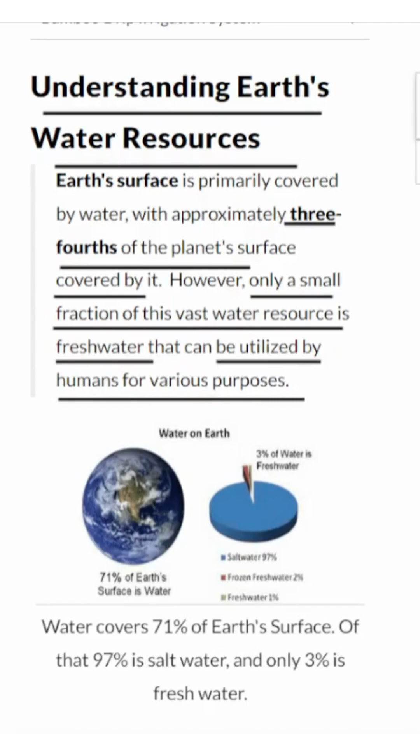The kind of water we can use for various purposes like drinking, farming, and more. So where does this fresh water come from? Well, the main sources of fresh water are surface runoff and groundwater, and these are both vital parts of something called the Earth's hydrological cycle.

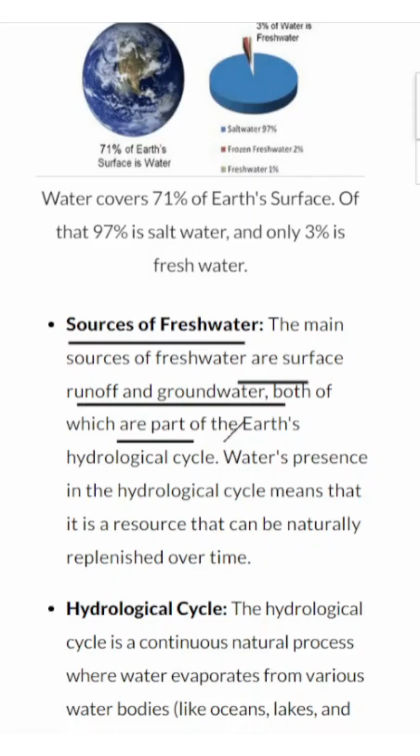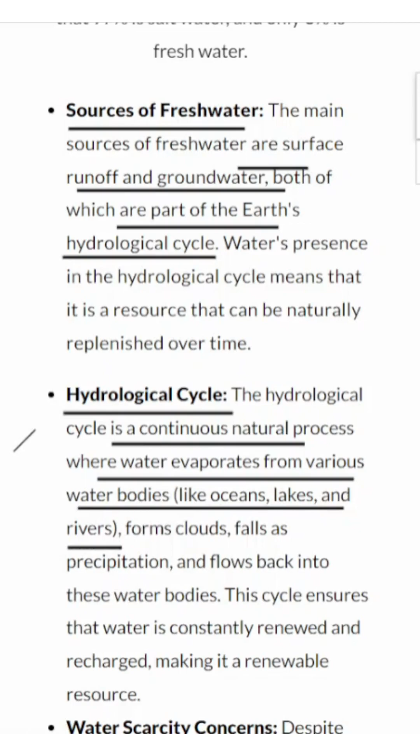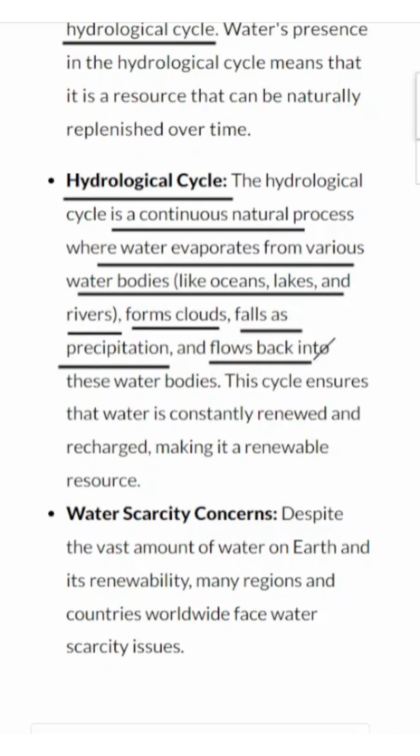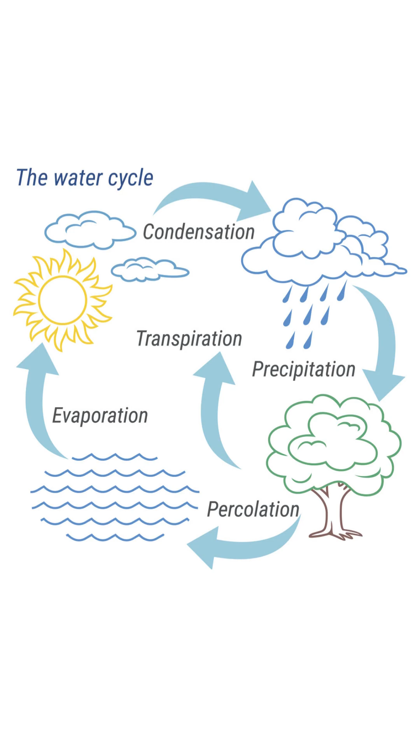The hydrological cycle is like a never-ending dance of water. It all starts when water evaporates from various water bodies, such as the oceans, lakes, and rivers. This vapor forms clouds, and then, like magic, it falls back to the Earth's surface as precipitation. After that, it flows back into those same water bodies where it started. Imagine it like a giant water recycling system. This cycle ensures that water is constantly renewed and recharged, making it a renewable resource. It's like nature's way of ensuring that we have a fresh supply of water.

Now, despite this fantastic cycle and the abundance of water on Earth, there's a bit of a problem. Many regions and countries around the world face water scarcity. So even though Earth has lots of water, not all of it is easy for us to use.

Let's quickly solve a question to revise what we have learned. How much of Earth's surface is covered with water?

The correct answer is option C, 3/4. About 3/4 of the Earth's surface is covered with water. That is, about 71% of the Earth's surface has water in it.

Now that we've explored Earth's water resources, let's turn our attention to a critical issue: water scarcity and the need for water conservation and management. Why is it so important? Well, let's dive right in and find out.

Despite the apparent abundance of water on Earth, the looming threat of water scarcity persists. Water shortages aren't limited to regions with low rainfall or prone to drought, such as the arid deserts of Rajasthan. Often, water scarcity arises from overexploitation, excessive use, and unequal access among different societal groups.

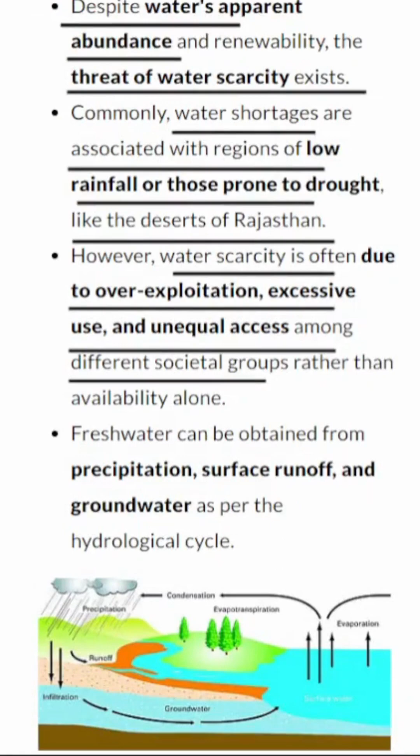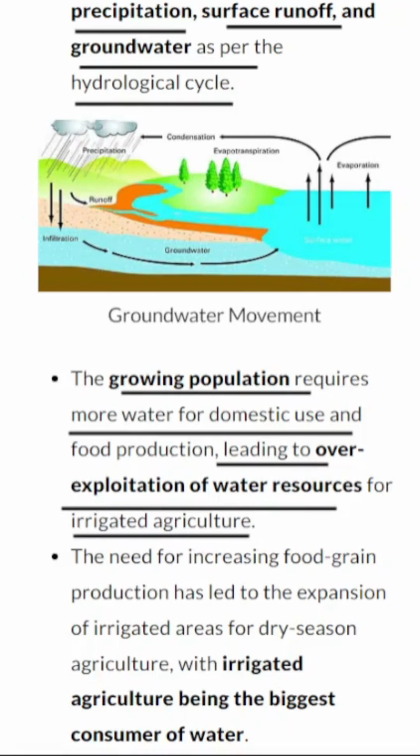Freshwater, essential for survival, is sourced from precipitation, surface runoff, and groundwater through the hydrological cycle. The growing global population demands more water for domestic use and food production, leading to the overexploitation of water resources, especially for irrigated agriculture.

Irrigated agriculture, which significantly contributes to food grain production, happens to be the largest consumer of water. To address this issue, there's a pressing need to revolutionize agriculture by developing drought-resistant crops and promoting dry farming techniques. These steps are crucial in mitigating water scarcity, ensuring food security, and preserving freshwater resources.

Furthermore, post-independence India has witnessed substantial industrialization and urbanization, offering abundant opportunities for growth. However, the rapid growth of industries places immense pressure on existing freshwater resources, as industries are heavy consumers of water and power.

Let's solve another question to test our understanding. Which sector is the biggest consumer of water?

The correct answer is option C. Irrigated agriculture is the biggest consumer of water. This is because water is essential for crop growth, especially in areas where rainfall is not sufficient or reliable.

Hydroelectric power plays a pivotal role in India's energy landscape, contributing to approximately 22% of the total electricity produced. This renewable energy source harnesses the power of flowing water to generate electricity, making it an environmentally friendly choice.

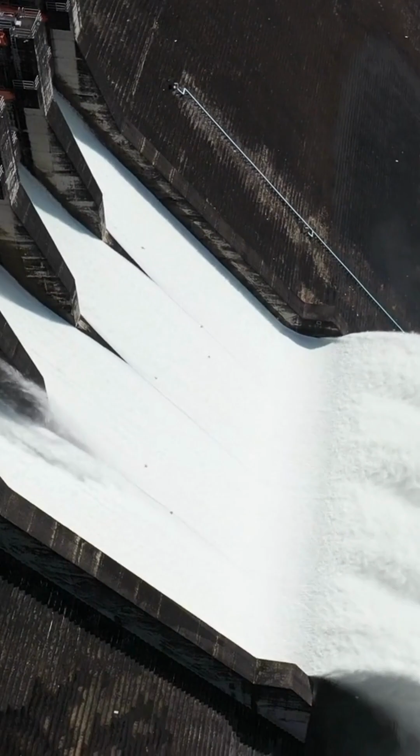However, the increasing growth of urban centers with dense populations has raised the demand for both water and energy, further compounding the challenge. While the quantitative aspect of water scarcity is a pressing concern, there are situations where water is available

in sufficient quantities, but its quality is compromised due to pollution. Pollution sources range from domestic and industrial waste to chemicals, pesticides, and fertilizers. Ensuring access to clean and safe water is critical for the health and well-being of communities.

Recognizing the importance of improving people's quality of life, especially in rural areas, the Indian government has launched initiatives like the Jal Jeevan Mission. This mission is dedicated to providing every rural household with a regular supply of potable piped water, addressing both the availability and quality of water.

Let us now delve into the concepts of multipurpose river projects and integrated water resources management, which are essential pillars for ensuring the efficient and equitable use of our water resources in an ever-evolving world.

Dams are more than just structures for irrigation. They serve a multitude of purposes, including electricity generation, water supply for domestic and industrial uses, flood control, recreation, inland navigation, and fish breeding. These projects are now referred to as multipurpose projects, where the various uses of impounded water are integrated.

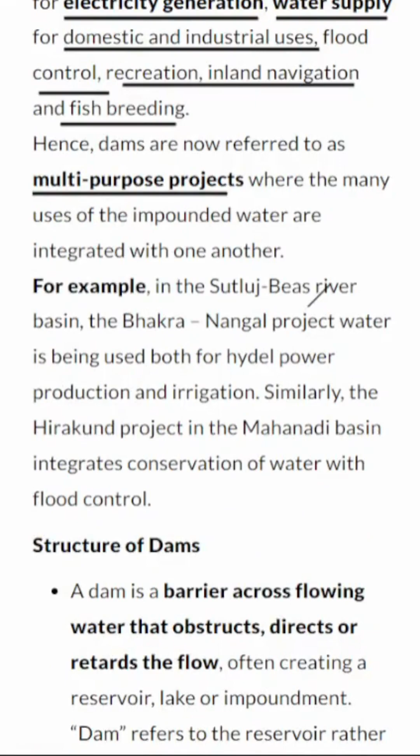For instance, the Bhakra Nangal project in the Sutluj-Beas River Basin efficiently combines hydel power production and irrigation. Similarly, the Hirakud project in the Mahanadi Basin integrated water conservation with flood control.

Structure of dams. Dams are engineering marvels designed to obstruct, direct, or retard the flow of flowing water, often creating reservoirs or impoundments.

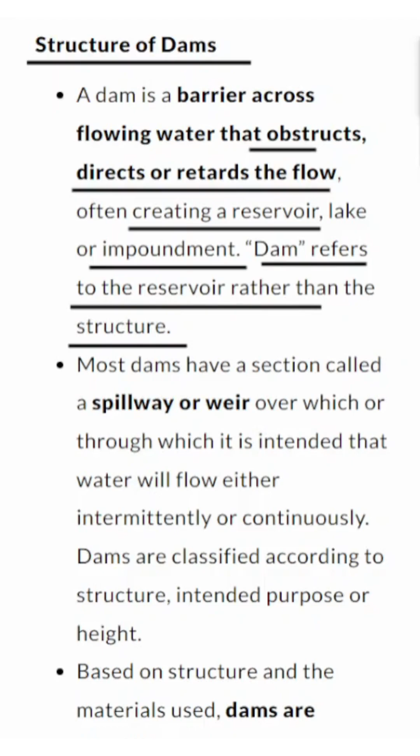It's important to note that the term dam refers to the reservoir formed rather than just the structure itself. Dams come in various types based on structure and materials, including timber dams, embankment dams, and masonry dams. They can also be classified by height, such as low dams, medium-height dams, and high dams.

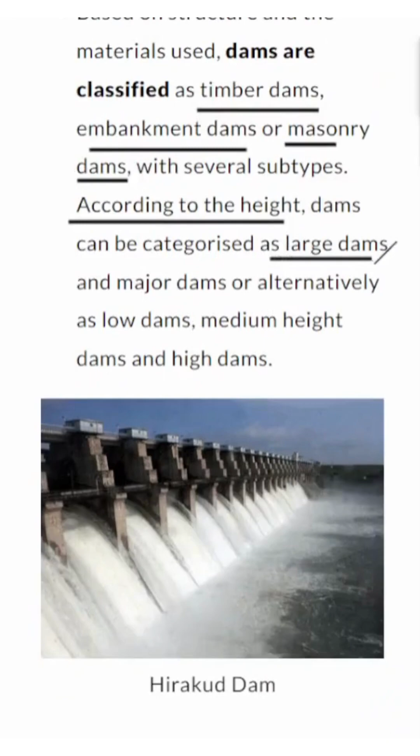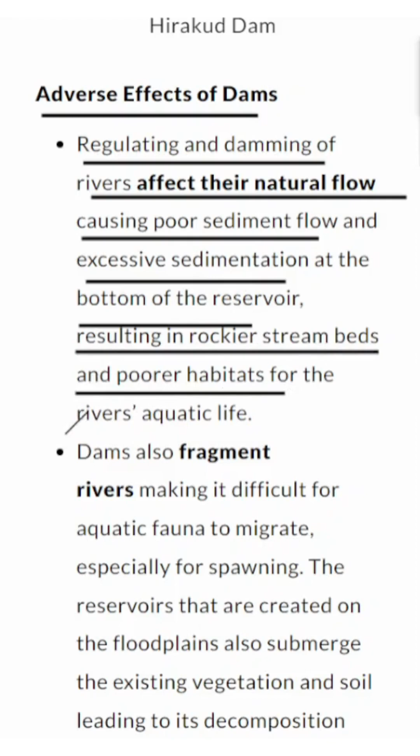Adverse effects of dams. While dams offer numerous benefits, they also have adverse environmental impacts. Regulating and damming rivers can disrupt their natural flow, leading to poor sediment flow and excessive sedimentation at the reservoir's bottom. This can result in rockier stream beds and less hospitable habitats for aquatic life. Dams can also fragment rivers, making it challenging for aquatic fauna to migrate, particularly for spawning. Additionally, the creation of reservoirs on floodplains can submerge existing vegetation and soil, causing decomposition over time.

Change in cropping pattern. Irrigation has been a game-changer in the agricultural landscape, leading to shifts in cropping patterns. Farmers have transitioned to cultivating water-intensive and commercial crops, which, while boosting agricultural output, carry significant ecological consequences. One such consequence is the salinization of soil, where the soil becomes excessively salty due to continuous irrigation.

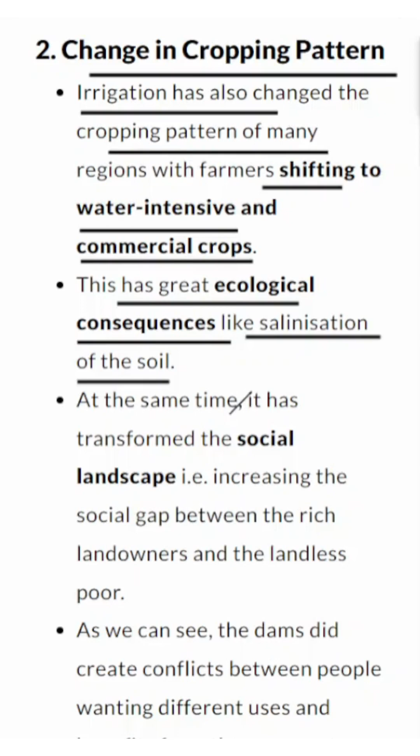This transformation in cropping patterns has also shaped the social fabric of farming communities. It has widened the social gap, creating disparities between wealthy landowners and landless individuals who rely on farming. Furthermore, the allocation of water resources for different purposes has often sparked conflicts among stakeholders with varying interests.

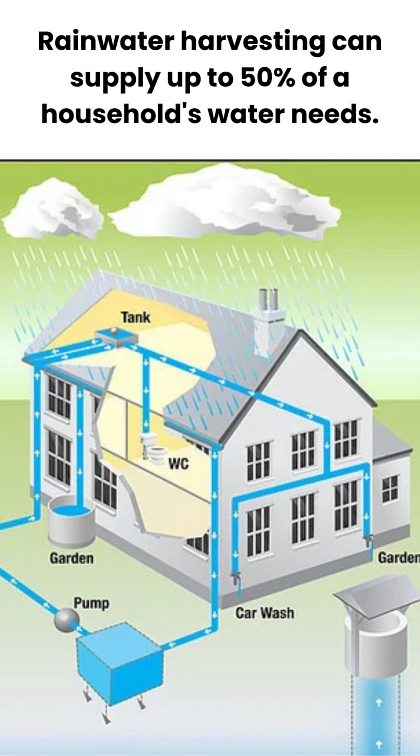Students, did you know? In some parts of the world, rainwater harvesting can provide up to 50% of a household's water needs, reducing the dependence on traditional water sources and promoting sustainability. Let us now explore the techniques, benefits, and role of rainwater harvesting in shaping a more sustainable future.

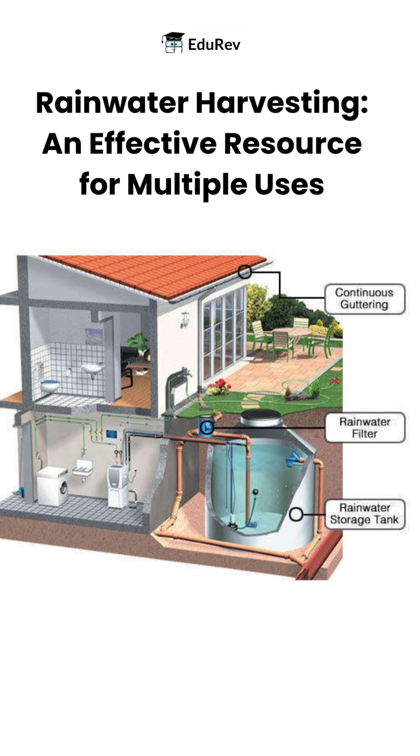Collecting and managing rainwater from rooftops is an effective way to harness a valuable natural resource for various purposes, such as irrigation, household use, or groundwater recharge. In this system, the process begins with the collection of rainwater using a PVC pipe. The collected rainwater is filtered using sand and bricks to remove impurities. Filtered water is stored in a sump for immediate use. Excess water goes to a well for storage and groundwater recharge. Water can be later extracted from the well for various purposes like irrigation or household use, ensuring sustainability.

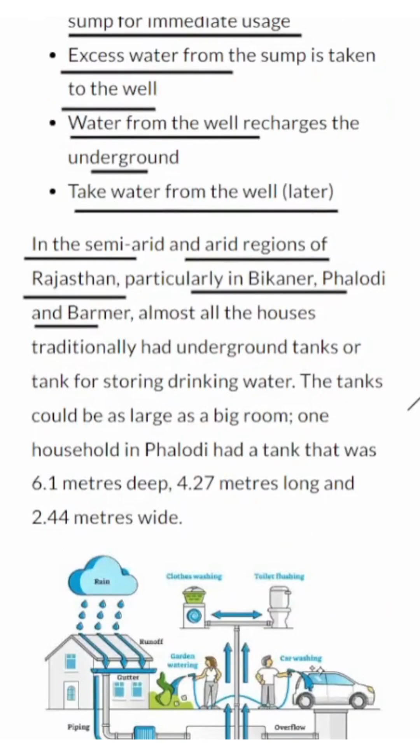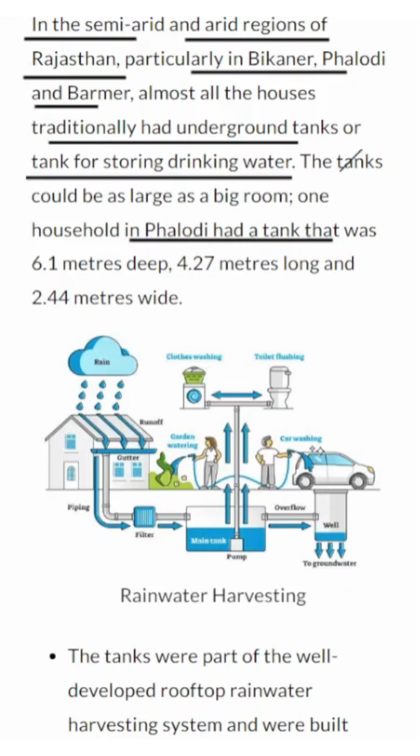In regions characterized by semi-arid and arid climates, like Rajasthan's Bikaner, Phalodi, and Barmer, traditional rainwater harvesting practices have been a lifeline. Houses in these areas traditionally featured underground tanks or tankas for storing rainwater. These tanks could be quite substantial, some even as large as a room. Rooftop rainwater was efficiently channeled into these underground tankas via pipes connected to the sloping house roofs.

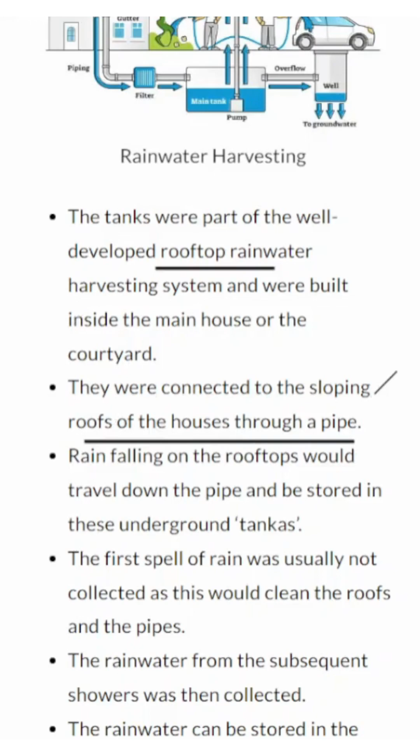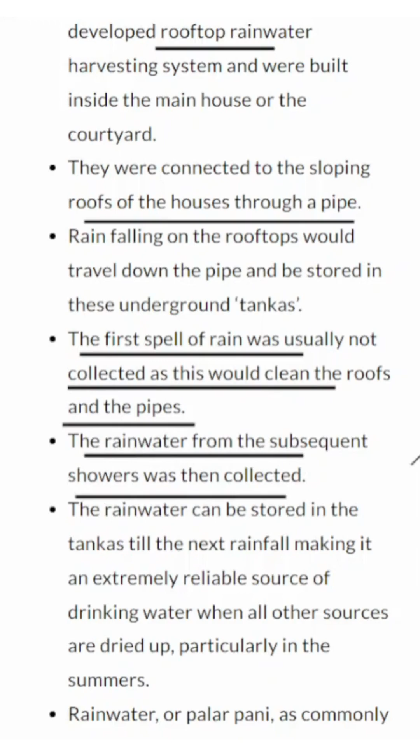Interestingly, the initial rain spell was typically skipped, as it served to clean the roofs and pipes. Subsequent rains were then collected and stored in the tankas. This practice ensured a reliable source of drinking water during the scorching summers when other water sources dried up. Rainwater, often referred to as Palar Pani in these regions, is considered the purest form of natural water. Some houses even constructed underground rooms adjacent to the tankas to stay cool during the summer heat.

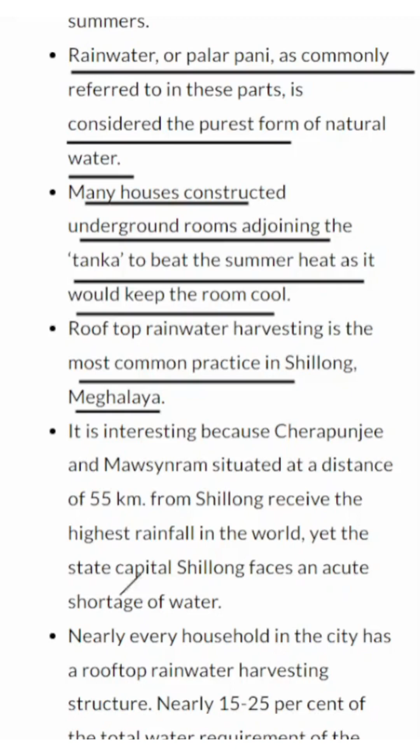Rainwater harvesting in Shillong, Meghalaya. In Shillong, Meghalaya, where annual rainfall is among the highest globally, water scarcity remains a challenge. Despite the abundant rains in nearby regions, Shillong faces acute water shortages. To address this, rooftop rainwater harvesting has become a prevalent practice. Nearly every household in the city has a rainwater harvesting structure. Remarkably, 15 to 25% of the total water requirement for these households is met through rooftop water harvesting.

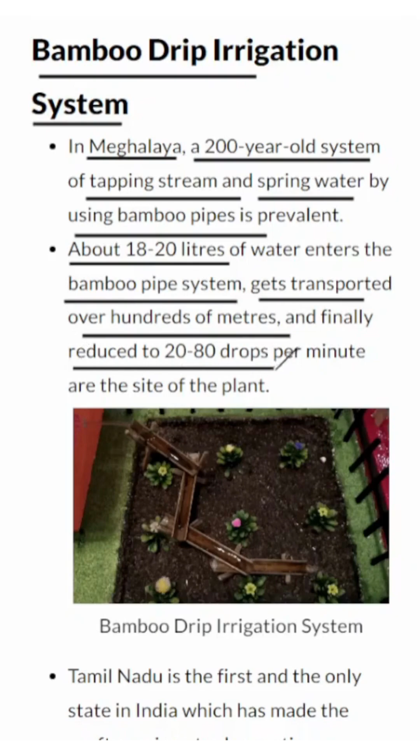Bamboo drip irrigation system in Meghalaya. In the state of Meghalaya, a 200-year-old marvel in water management exists, the bamboo drip irrigation system. This ingenious system taps into streams and springs, channeling water through bamboo pipes. The process begins with approximately 18 to 20 liters of water entering the bamboo pipe network. This water embarks on a remarkable journey, traveling hundreds of meters before reaching its destination. Along the way, the flow is gradually reduced to a mere 20 to 80 drops per minute right at the base of the plants. This ancient technique showcases the resourcefulness and environmental wisdom of the people of Meghalaya.

Let us now see the system of rooftop rainwater harvesting in Tamil Nadu. Tamil Nadu, a pioneer in water conservation, stands as the first and only state in India to mandate rooftop rainwater harvesting structures for all households across the state. Legal provisions are in place to penalize those who do not comply with this essential initiative. This practice has been a game-changer in addressing water scarcity issues.

For instance, take Gendathur, a place in Karnataka receiving an annual precipitation of 1000 millimeters. With an impressive 80% collection efficiency and approximately 10 rounds of fillings, each house can amass and utilize around 50,000 liters of rainwater every year. When you aggregate this across 20 houses, it results in a substantial 10 lakh liters of rainwater harvested annually. This demonstrates the immense potential of rooftop rainwater harvesting in mitigating water shortages and promoting sustainable water use.

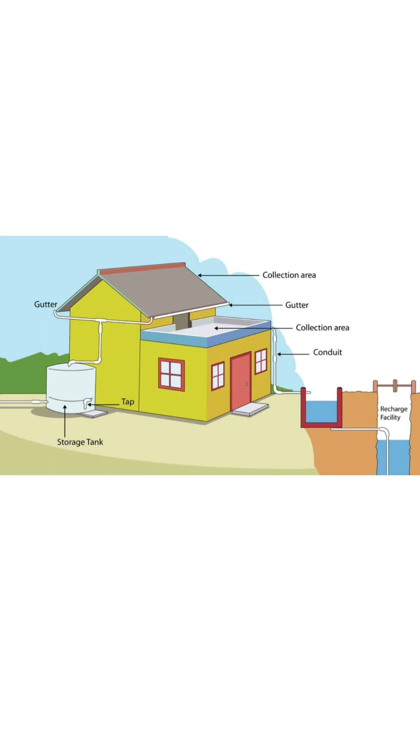So, students, in this chapter we have gained knowledge about several important topics, including understanding Earth's water resources, addressing water scarcity and the importance of water conservation and management, multipurpose river projects, and integrated water resources management, rainwater harvesting, and finally, the bamboo drip irrigation system in Meghalaya. These topics are essential for a comprehensive understanding of water resources and sustainable management practices.